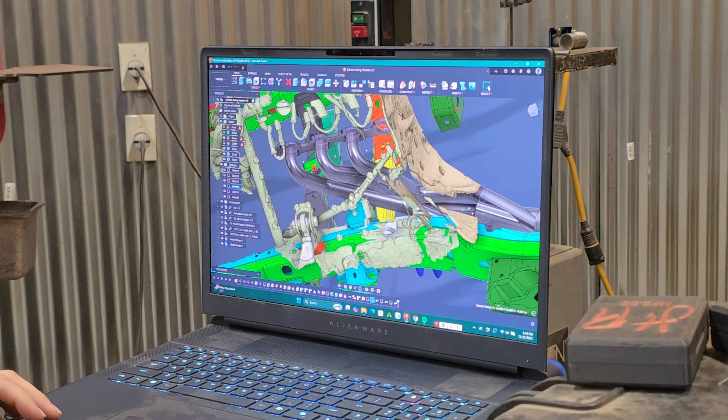Got all the scan file now put into Fusion 360. I did lay in my file for the LS3. Come to find out, there are a lot of similarities, but a lot of differences. Main thing being the degree on the heads itself. So not going to be able to use this as far as at least laying my planes in.

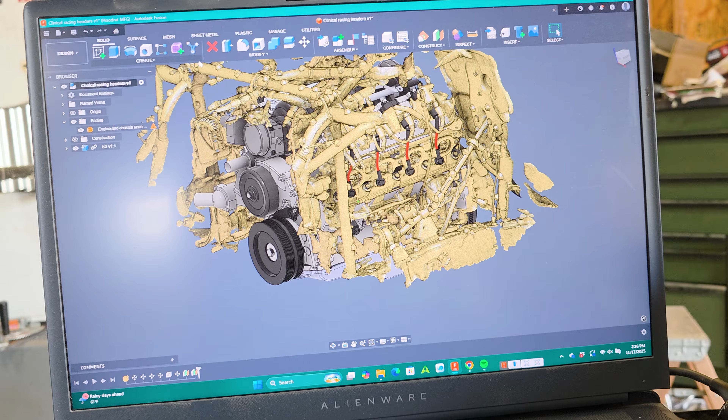So I'll have to make my own file and or my own plane that's going to go where the exhaust ports are. I also have to draw the flange because I don't have that drawn up in CAD as well. So I'm going to go ahead and do that. First step, get the flange drawn, and then I'm going to lay in the collectors I have where they need to be. That's usually my good starting point.

And then from there, I can go start with cylinder 1, then 3, 5, 7, start with the other side, get that done, and then we have a set of headers.

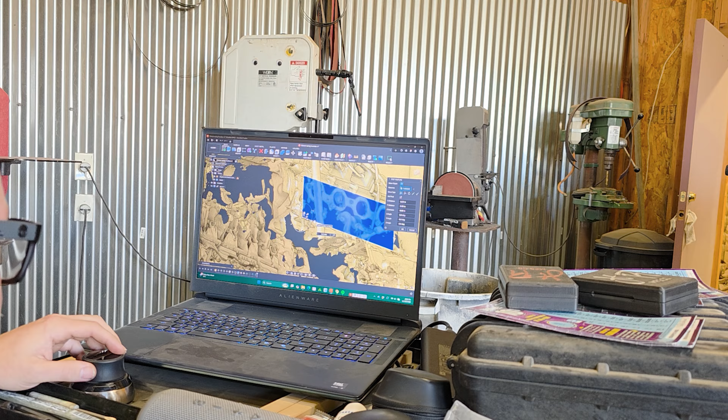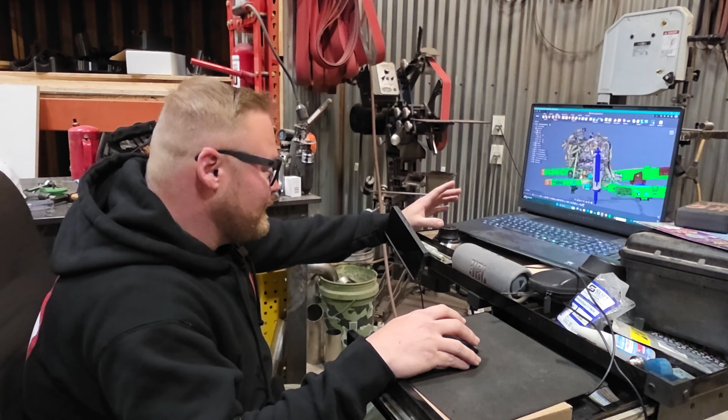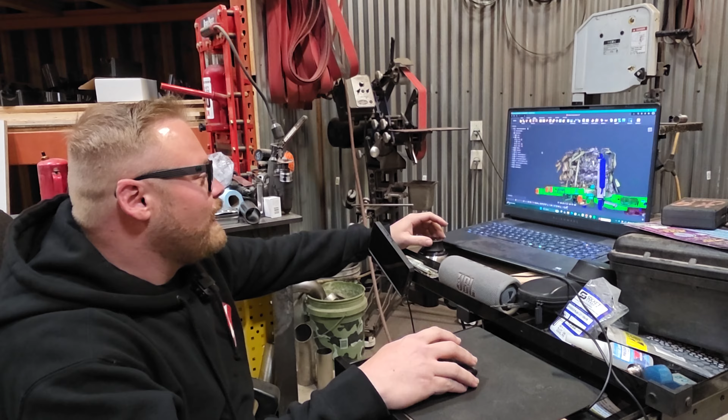How are things looking? Well, got a little bit figured out. We got everything landed in with our original files for the Colorado chassis frame. And I did a quick little, just kind of drew the flange, nothing really exact. I just more or less need the outside and a plane so I can start fitting the tubes. I also took the time, threw in the bypasses so that way I have an outer boundary to work with. But now in CAD, I have essentially the whole thing and I can just remove.

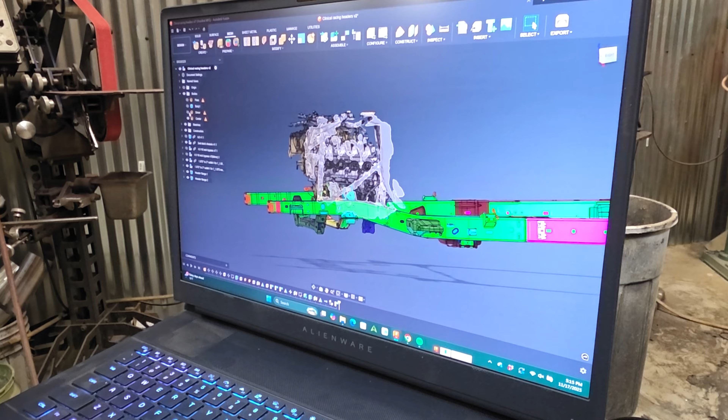And then this is that frame file we were talking about that we had. So we took the scan and then overlaid it onto the frame. And then on top of it, made it so that way I have the scan file at least separated so it's not a bunch of stuff in my way. So I can just always check with it, all right, cool, I'm clear, going down. Helps speed up the computer a lot better. And then we also laid in where our collectors are going to be. So now we have everything in there.

We're going with stepped headers. So we're gonna start with 1.75" and then step them up to 1-7/8", about 6 to 8 inches after the actual head. So that's gonna help free up a lot of gas flow. And it's gonna give a little bit of back pressure right at the start and then allow things to speed up a lot faster right after all the bends. So that way there's a little less of a resonating kind of tinny frequency going through all the bends.

So everything in math on paper makes sense to what we're trying to do. But realistically, it's an instrument. So we won't know until the first fire up. But at least we're in the right direction. We're actually getting things started, getting things in the right places. And now all I have to do is just start drawing lines. And again, using my supplier's catalog with certain degrees and bends and sizes, and good to go.

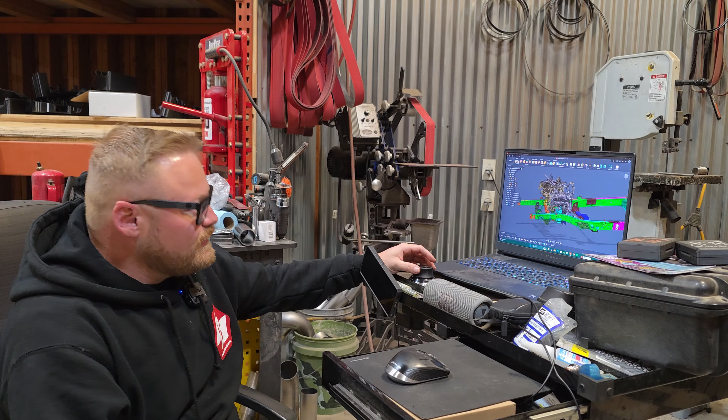Cool. So next is drawing lines to start figuring out where the tubes and stuff are going. Yep. How do you start that? Do you just start drawing lines and kind of see how things go? What's your method to the madness? Well, the first part for me, it's a little time consuming because I have to figure out what the firing order is. I already know what the firing order is, but now I have to separate that order by bank.

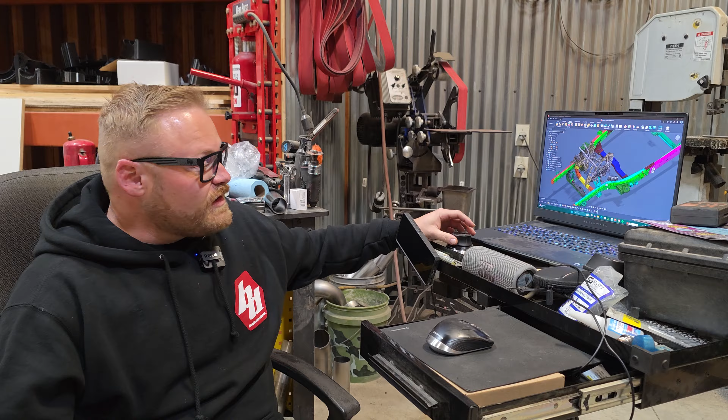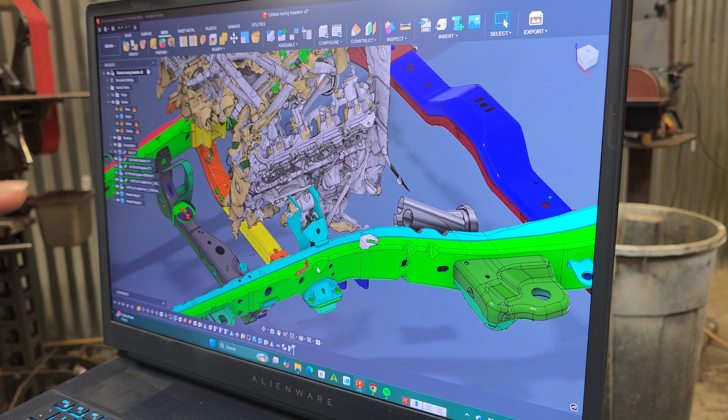So what I do is figure out what's my closest cylinder, which would be the closest to the collector, on this side, cylinder 7. Cylinder 7 I normally wait till the end, so I will start with cylinder 1 and get as close as possible. And at that point, I'm gonna start visualizing in the firing order specific rotation, which with this collector, I need to do counterclockwise. So I'm gonna fit it, just as a guess, to this back corner right here. And then I can start throwing some generic lines where I want it to go and start tweaking where I want it to fit.

And once I have the room I feel like I need, then I start adjusting that line to the length I need it to be. Once I have that figured out, then I can start laying the next cylinder, next cylinder, next cylinder. And usually right around when I have 3, I start realizing that I laid it in the wrong rotation, and then I have to kind of fix it. But at that point, it starts moving a lot faster.

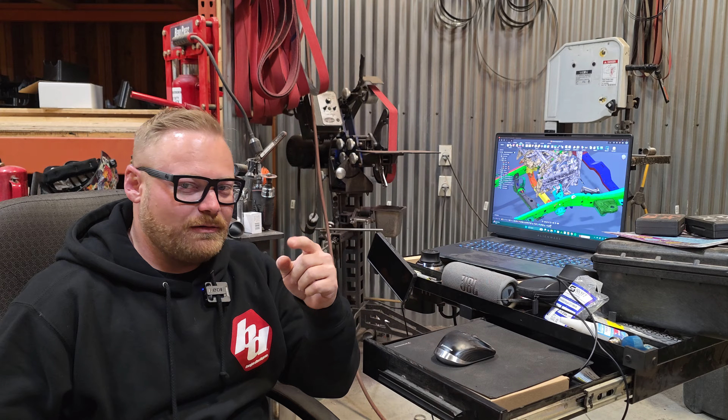It's more or less just figuring out which entry of the collector do I want cylinder 1 to be compared to cylinder 7. That's how I never worry about the middle, because the middle are going to go on either side of that. So I have to at least figure out, can I fit 31 to 34 inches from cylinder 7, which is the closest to the collector itself.

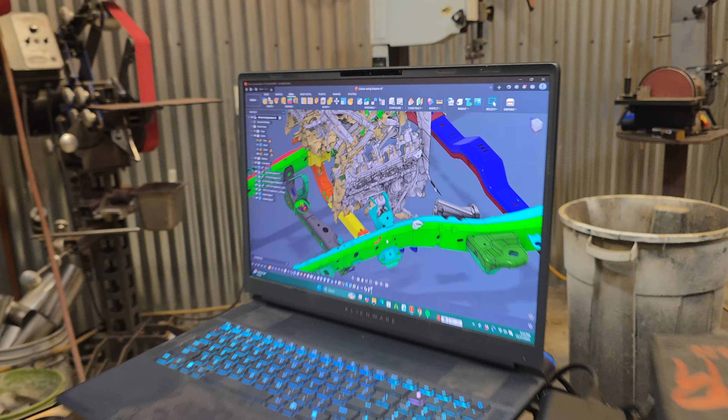So I got to start playing with some centerline radius and seeing what I can fit. So we'll go from here and we'll go walk over to the truck just to see it. So is there going to be an easier side to do compared to the other, or are they going to go pretty much the same on both sides? I always start with the harder side, which is the driver, because I have to work around a steering shaft. But realistically, that isn't the hard part.

The hard part with Chevys, because of the firing order, I have to lace up some tubes that are going to fit around on the passenger side. So the driver's side comes out looking pretty because it works better in the firing order. Rotation, once I go to the passenger side, I have to start crossing tubes. So I have to come kind of through them to fit it out. So it ends up being harder, but the driver's the harder one because I have to fit it around things. I have more room on the passenger side, but it's harder to figure out.

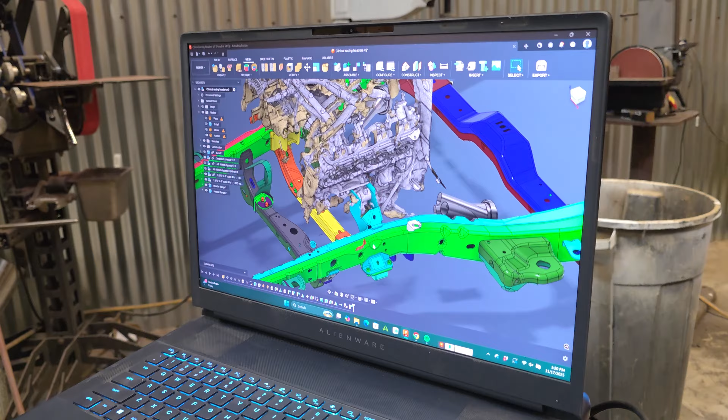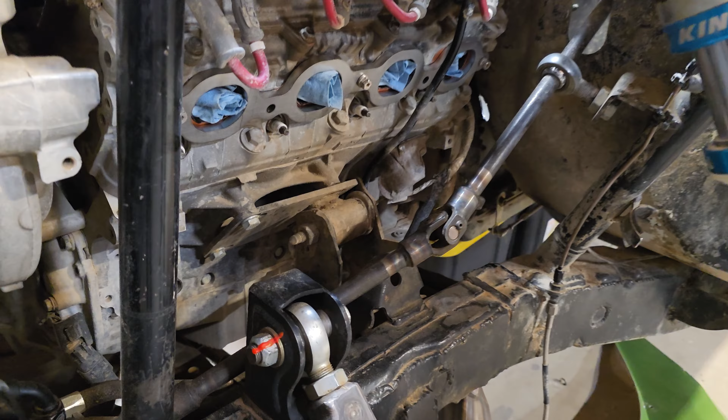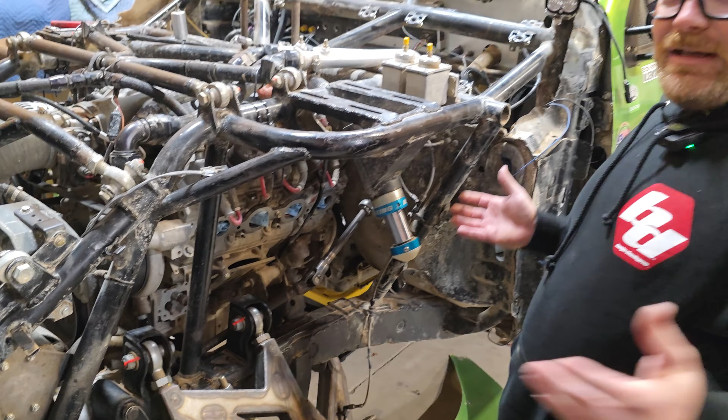So let's go, we've got that. Let's go walk to the truck just to go see it now from the computer, actually on the truck, kind of what we're looking at and talking. So this is it now, actually over at the truck, and you want to just kind of walk and kind of show what you're looking at on the computer, but what we're doing over here? Yeah, so it definitely looks different. I've already obviously fit everything in CAD, so I do know where everything's going to be, but the collector is actually going to be way back down here. It doesn't look like it, but in CAD, that's where we have it.

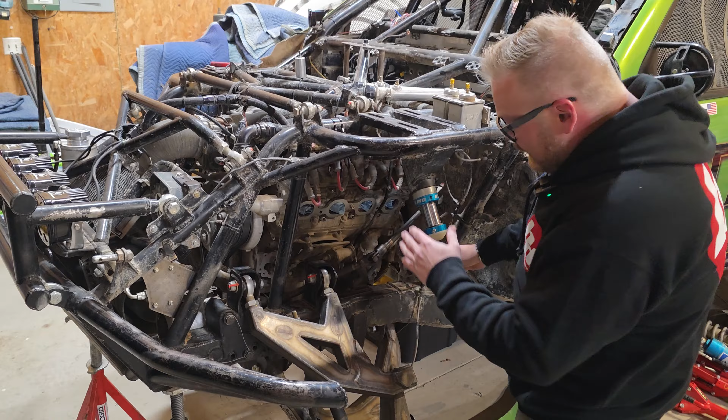So I have to fit this tube at the same time of making sure this tube is also the same length to get to where I need it to be, because this one's going to be all over the place through here. This one's going to be as straight a shot as possible because it's the shortest distance. Do we have some room that we could go up a little bit to get length out of? Yeah, we should be able to, and that's also why I fit the bypass in there, because I'm going to probably have to come up and around and closer to the bypass here to come and make it down there.

Perfect. And then if we go walk to the passenger side, obviously not dual steer on the truck, so only one steering shaft to worry about.

So that would make some content though if we did one driver gets the steering, one driver gets the gas and throttle, and just figure it out. Keep flipping the switch.

So this one has a lot more room, minus the starter being in the way. But the problem I have is these two cylinders are swapped in the rotation. So now it may look like I can match the other side, but what I really have to do is I have to cross both of those cylinders. So I actually have to now lace tubes together to kind of fit through each other. So tie a knot between the two tubes. Pretty much, yeah. 1 7/8 tubing in a not so big hole. Yeah, to say the least. Perfect.

And then what are we doing past that? Once we get to the collector, what are we gonna start doing afterwards? So right after the collector, aside from O2 bungs, that's guaranteed. We need that for the Holley ECU. But we're gonna tuck an X pipe about 20 inches past that. So we're gonna go right under the mid shaft on the drive shaft, and there's plenty of room. The last exhaust was already at that same exact level. It just wasn't crossing underneath it.

So we're gonna fit it there, cross underneath, and then we're gonna come out to the exit, and we're gonna do something with the hint of NASCAR, similar to a boom tube setup. I may hate it when it's loud in driving, but I don't care because it's our exhaust. Yep. So we may do something crazy, but we're gonna do something really unique on that. And it's gonna take a lot of cutting and fitting and doing all sorts of stuff, but it's gonna look so cool. Perfect. Well, let's go see some more done on the computer, and pretty soon they'll be on the truck.

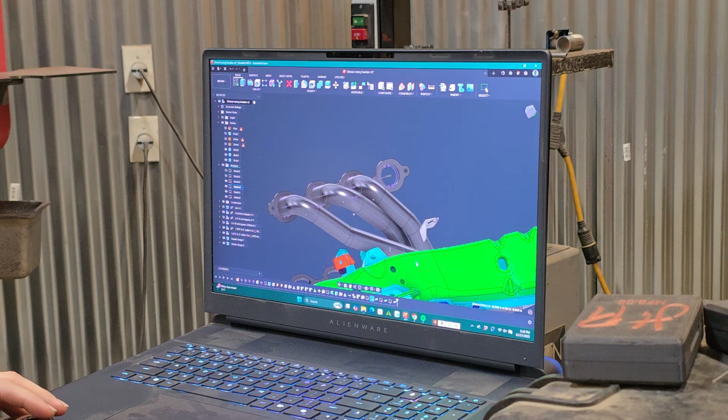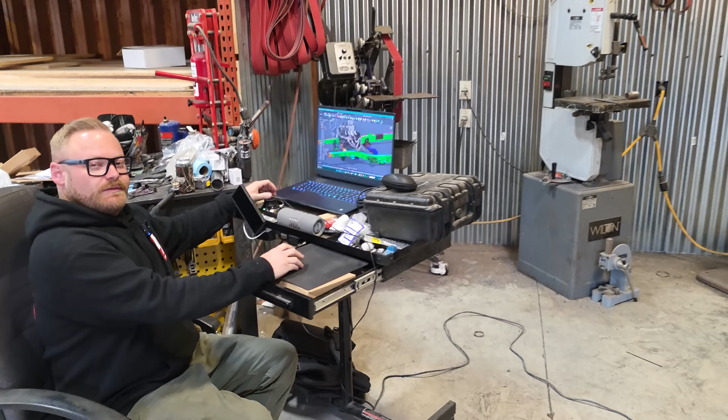So Matt, I heard you made some progress on everything exhaust-wise for the truck. Yeah, we got them dialed. Everything is exactly perfect. I wanted to go a little longer, but come to find out, we don't have room for that. But we're still able to get 22 inch primaries in there. So that's going to give us a good kind of mid-range, a little higher than mid. We're about 4,000 to 6,000 peak torque. So that works perfect because that's where we're going to be living.

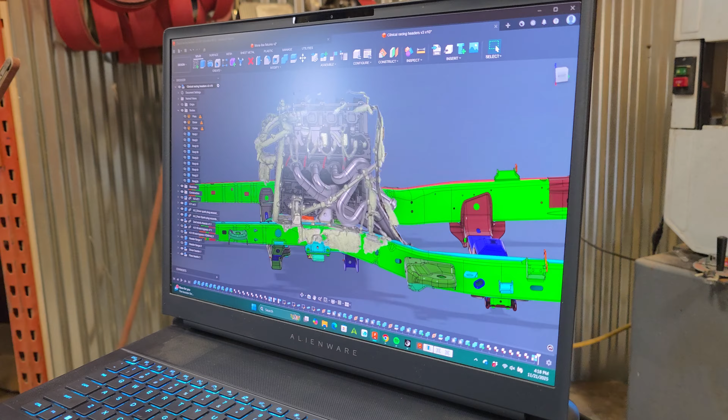So this all should go good as far as the math, as far as getting the horsepower going. But the real key is getting that sound, and that's what I've got to work on next. But at least now, granted, it doesn't look the best on the driver's side, but we do have a lot of stuff to work around, including very large 4.0 bypasses that are kind of in the way. Yeah, this one, there's just no way.

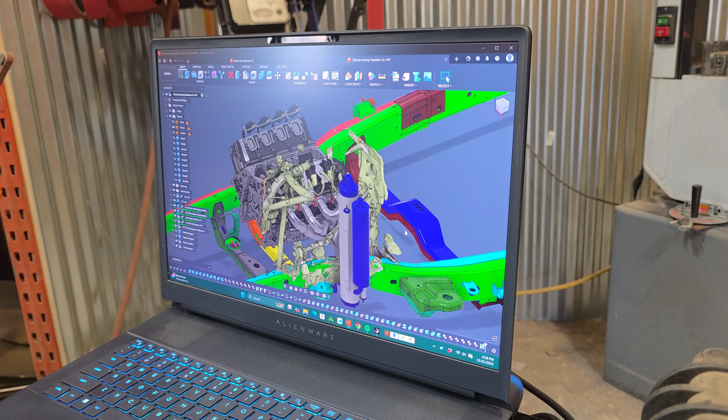Obviously, most trucks, prerunners, all that stuff, you can work the exhaust to the outside of the frame rail. There's just no way we can fit it. I mean, we can fit 40s if we wanted to, but we still can't fit an exhaust back there. Yeah, it takes every bit of room.

But the real fun part was the driver's side was the hardest to start with, until I had to rechange that, jump to the passenger side to kind of pass some time and at least get that thing going, until I changed the driver's side again, which had me redo the passenger side again, because I'm putting too much time into it because it's ours and not just the customer's. And I can't put that much time into a customer because they only pay so much. For us, though, I can put the time in.

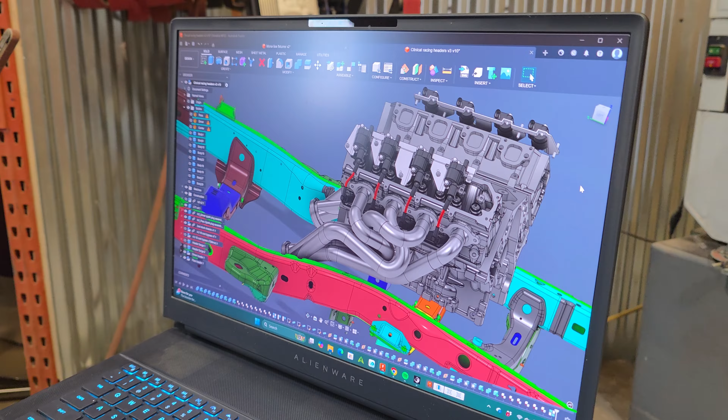And the real kicker here is our pretzel. We have a pretzel on the passenger side that is fitting 22-inch primaries that are stepped up to 1 7/8 from 1 3/4 at a perfect 6-inch distance on every little bit of it, going right into a mirrored set of cyclone collectors that are going to get us right to the perfect X pipe. So we have 2 different cyclones that are going to be matching at the X, and that's going to free up a lot of weird noises and exhaust flow. So this thing should be flowing really well out the back.

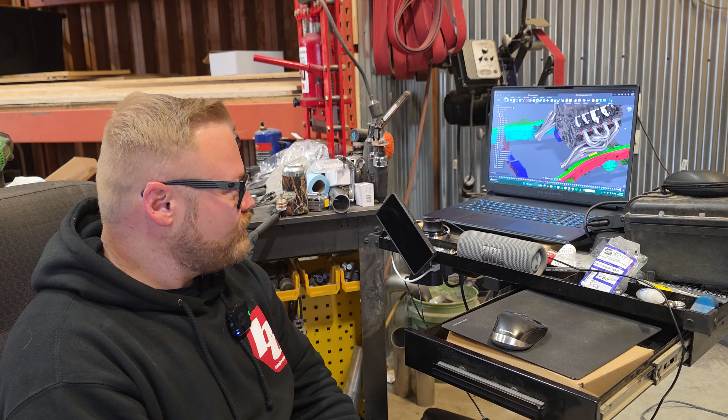We haven't gone out and measured, but we can pretty much say the old ones on the truck were 1 5/8. Yeah, they were 1 5/8 at minimum. And the rear 2 cylinders, cylinder 7 and cylinder 8, I think measured around 9 inches compared to cylinder 1 and 2 that were 16. So nearly double. All different sizes lengthwise, and we've also gone up a 1/4 inch in diameter over the old exhaust, so obviously a lot more.

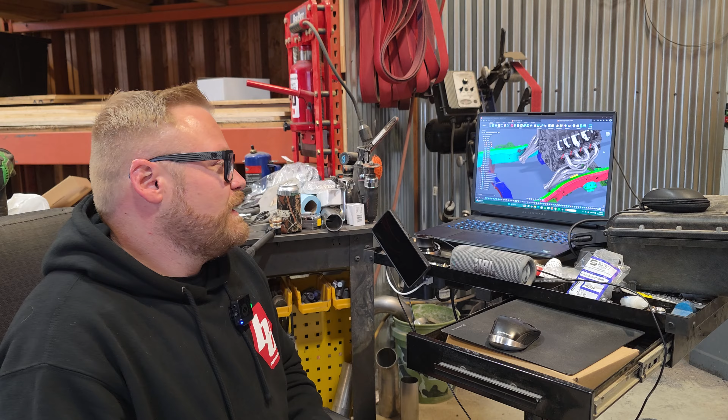Yeah, so what's nice too about having the stepped header is the initial exit is going to have that punch, and then it's going to jump and free up a little bit. So it's going to speed up the exhaust flow after it's past the head. That way all the back pressure needed at the exhaust valve is there, and then it's going to free up right after that. So it's going to help dial our torque in right around 4,500 to 6,000. Still just can't get over it.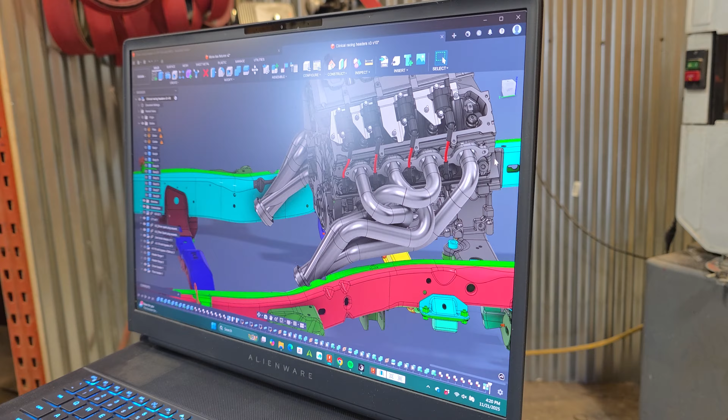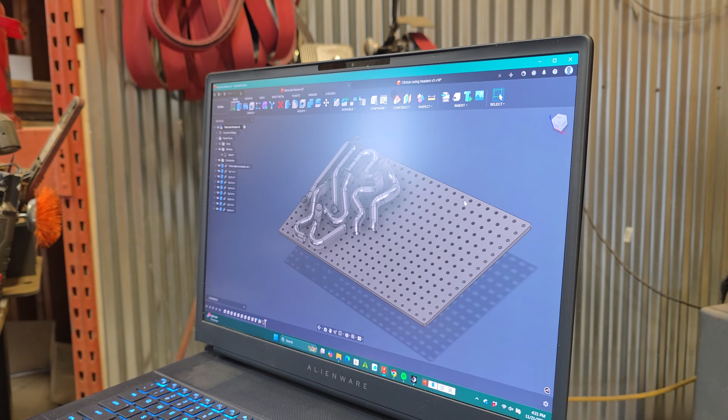Yeah, that pretzel's probably one of the coolest ones I've designed. And there is still room that I can fit at least a 16th between each tube, so it's not too much. But you can see the stepped portion right here on everything. And the next part is I already have them laid out on the fixture table, so we can start figuring out how we're going to draw this up. Perfect. And start laying some tubes down.

That's awesome. So next step, now that we've got all this drawn, we're figuring out some measurements for the collector back for that part of the exhaust. Yeah, and then it's call up our good boys at JMD Tubes and get a nice order of stainless coming, and turn the virtual into a reality. Absolutely. And get these on the truck. If we play this right, we should be able to finish this right as our wiring is finished. Yep. So it's literally slap the truck together and hit those loud tubes.

Oh yeah. Let's go. Make some music. First fire up on these is going to be awesome. We need everyone here. We need to get the whole team together and we need the shock value. First startup with the new exhaust, with the new PDM setup. It'll definitely be good to have everyone here. Everyone just needs to hear it, kind of reignite that fire too. All of us are probably just now rested up from our thrash right before the Mint. Yeah, it only took a year.

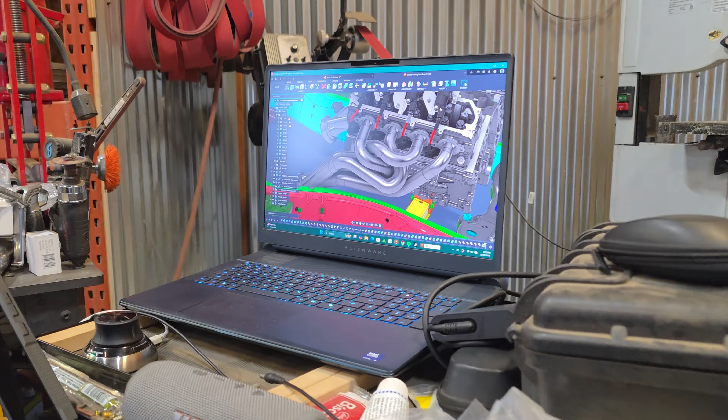But yeah, we're good. And I really want to see this pretzel in person. Yep. Oh yeah. I'm not going to enjoy doing it because I made it as hard as I physically could for myself. But it'll be good. Hey, it looks great. Can't wait to hear it. So it's going to be super exciting. Awesome. So next step, stay tuned. This is going to be sitting in real life pretty soon.